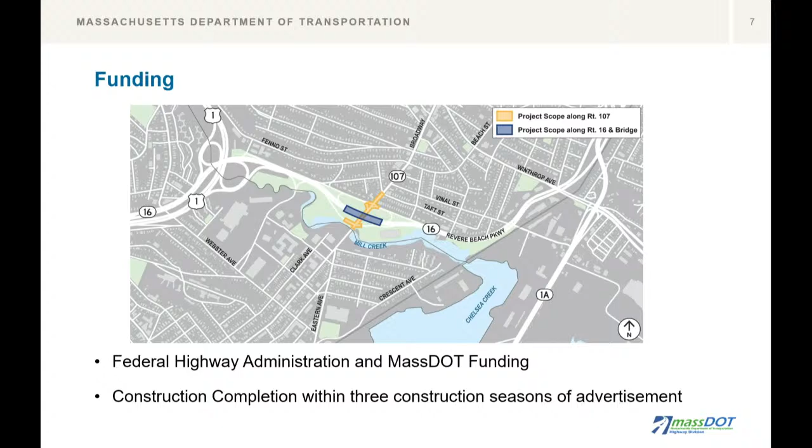So funding for this project, we estimate that the total project cost will be about $14 million to replace this bridge and do some improvement to the ramp work. And that will be in terms of 80% from the Federal Highway Administration and 20% from Mass DOT. Our anticipated construction completion is within 3 construction seasons from advertisement.

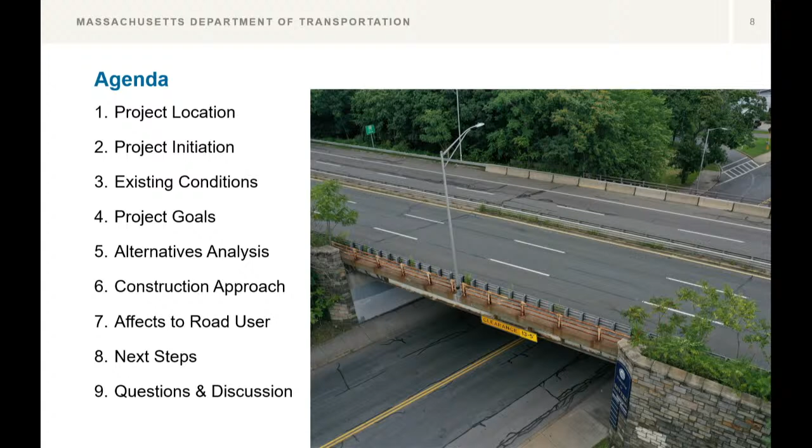So here's what we're going to be going over tonight: the project location, how was this project initiated, the existing conditions of the project, the goals of the project, the alternative analysis and proposed design, our anticipated construction approach, how this project will affect our roadway users, yourselves, the next steps for the projects, and then we'll do question and discussions. So where is the project located?

So maybe many of you drove under this bridge to get here tonight. I know that I did. And so it's located, you can see here, on Revere Beach Parkway is the bridge, or Route 16, over Broadway, Route 107. The project is north of Mill Creek and south of Taft Street.

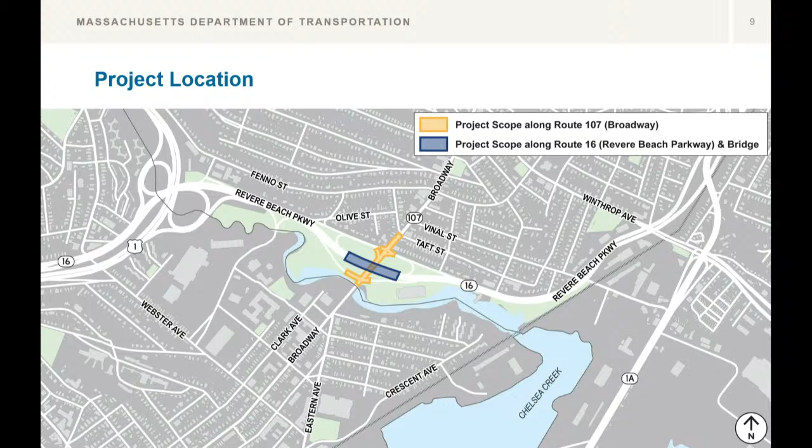So why was this a project initiated? How did this become a project with the Department of Transportation?

As you may be aware, the reason for the project is because the existing bridge is in poor condition. There are numerous noted deficiencies, which is why MassDOT has labeled this bridge as one that needs to be replaced.

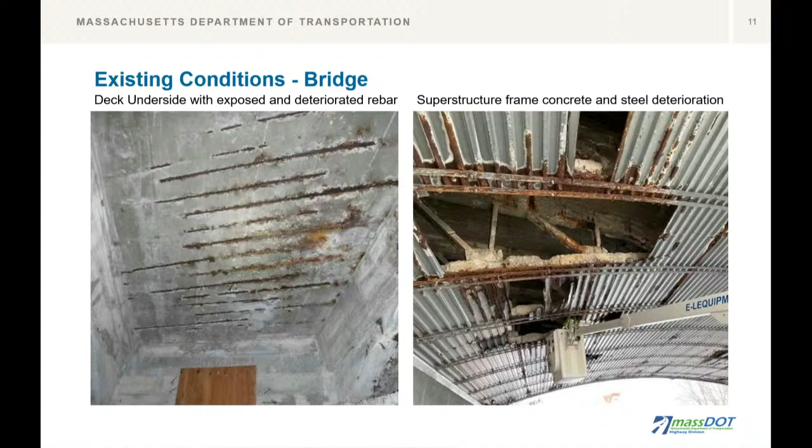The bridge was built in 1930 and was widened in 1958. It provides local connections between Medford, Everett, Chelsea, and Revere, and many regional connections between Route 1, Route 1A, and Interstate 93.

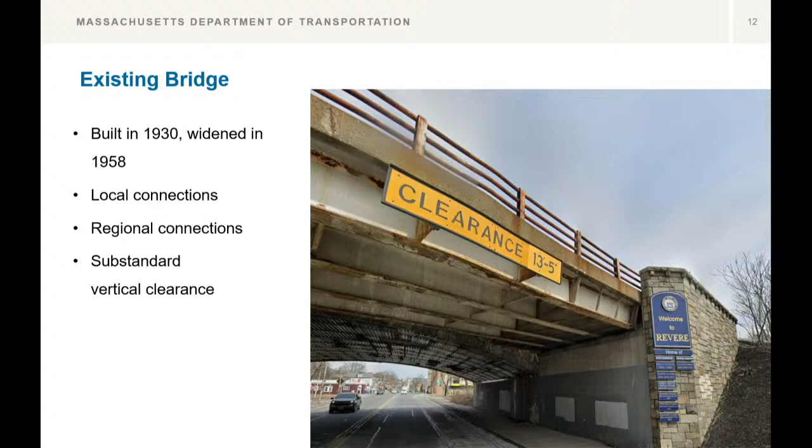Clearance is noted there because the existing clearance is currently substandard vertical clearance.

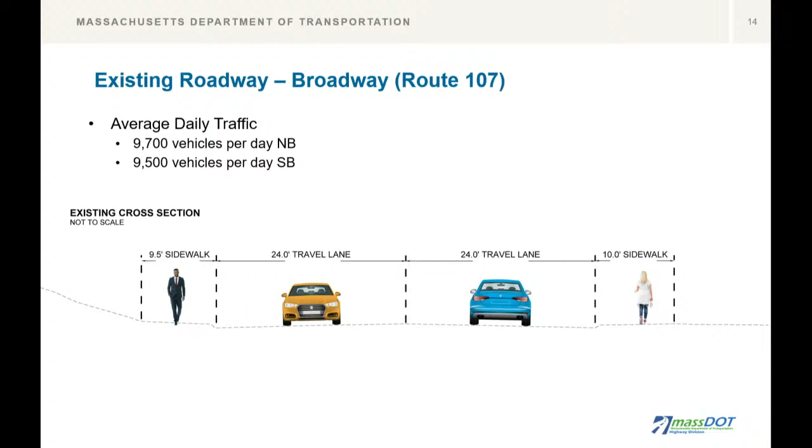The nearest bus stops to this project are at Taft Street to the north and Cabot Street to the south. The MBTA bus network redesign, as part of the Better Bus Project, identifies this route, T116, as an all-day high-frequency route.

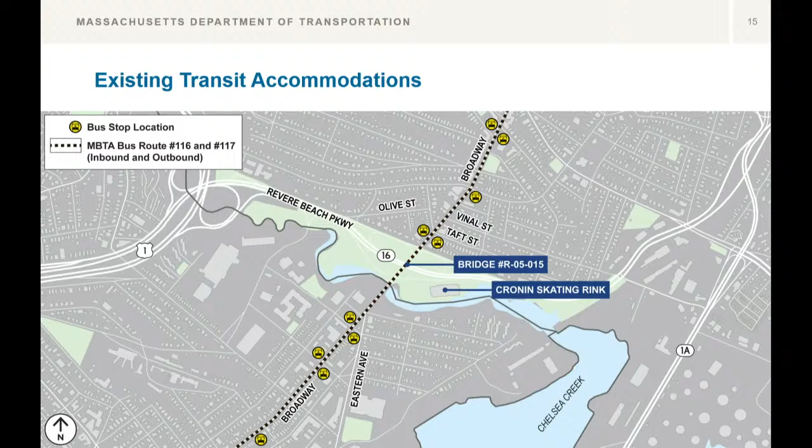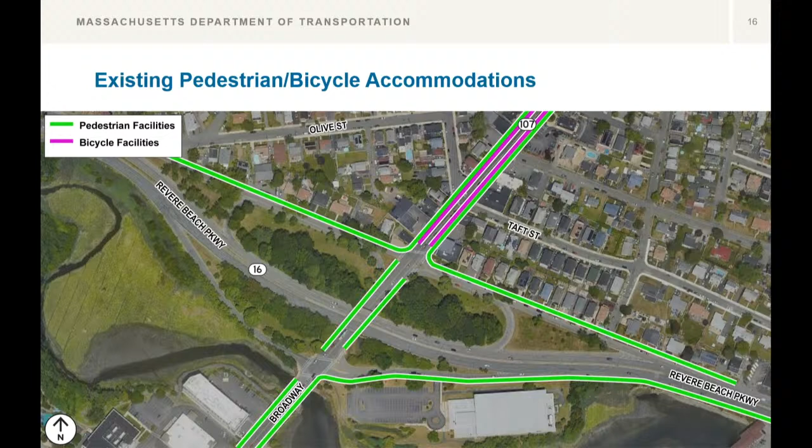Again, our project is the bridge replacement on Revere Beach Parkway over Route 107.

So how did we get here to this public informational meeting tonight? In December of 2021, we issued a notice to proceed to Howard Stein Hudson to do the design of this project. In August of 2022, MassDOT approved the preliminary structures report.

In the fall of 2023, we conducted our subsurface exploration program and got the bridge type selection worksheet approved. Then in January of 2024, the pre-25%, or conceptual design, which is the stage we're at now, was reviewed by the department. And now here we are at the public informational meeting.

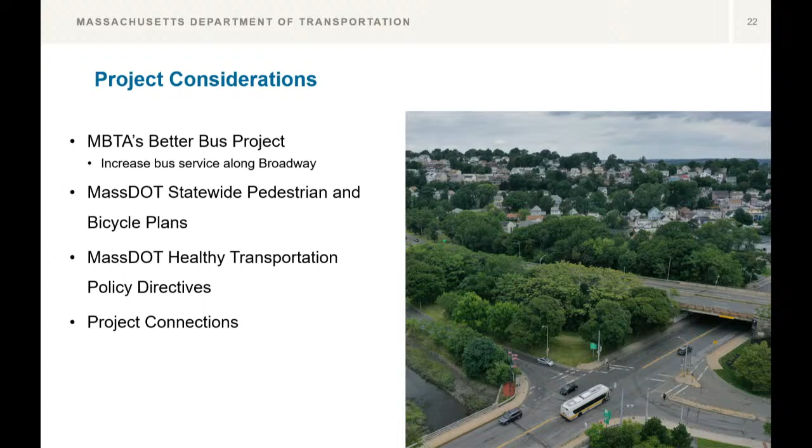Other project considerations are the MBTA's Better Bus Project to increase service within our project, MassDOT's statewide pedestrian and bicycle plans, MassDOT's healthy transportation policy, and making connections within our project to other projects being completed by others.

Project scope for Revere Beach Parkway and the bridge. As mentioned previously, the project includes complete removal and replacement of the existing bridge structure. We will need to rebuild Revere Beach Parkway to increase the profile over the bridge, required to improve the vertical clearance over Broadway. As the existing bridge is on the National Register of Historic Places, we also intend to maintain the historic character of the existing bridge.

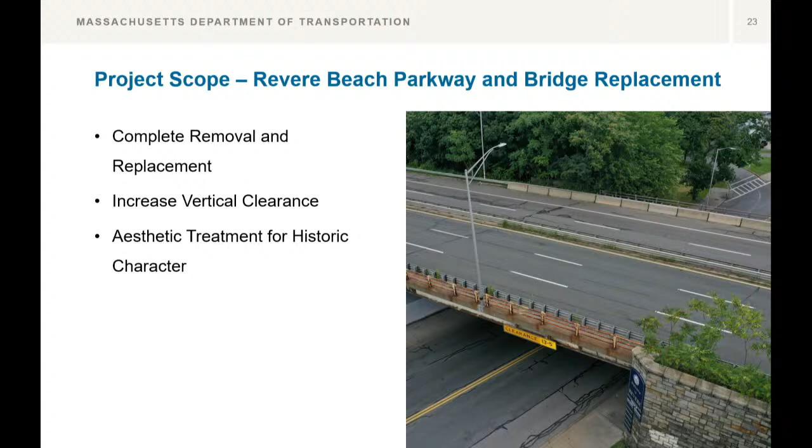We are proposing to make minor changes to Revere Beach Parkway in the final condition. However, we are proposing that the current westbound shoulder, shown on the left-hand side of the graphic, become an acceleration lane to assist traffic merging onto Revere Beach Parkway. The project is proposing to connect back into the existing Revere Beach Parkway configuration at the project limits. I will show a graphic later on to clarify that.

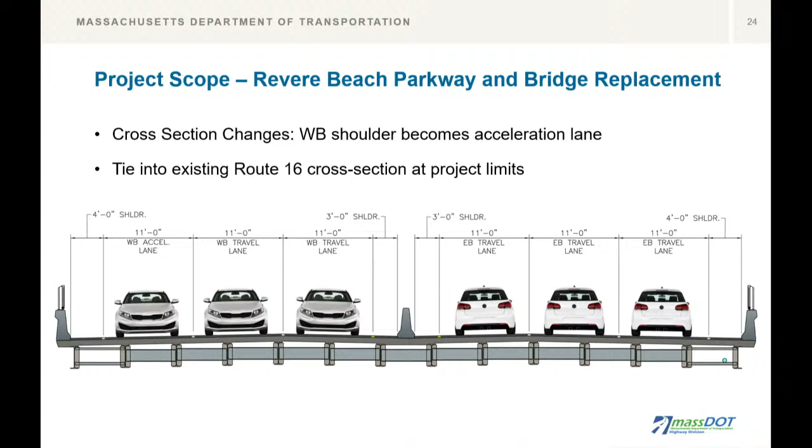Project scope for Broadway. The limits of our project begin at the Revere-Chelsea city line, shown at the bottom of your screen, and continue north underneath the bridge and up to the Taft Street intersection. We intend to reconstruct sidewalks on both sides of Broadway, add bicycle accommodations, and include bus priority measures where feasible.

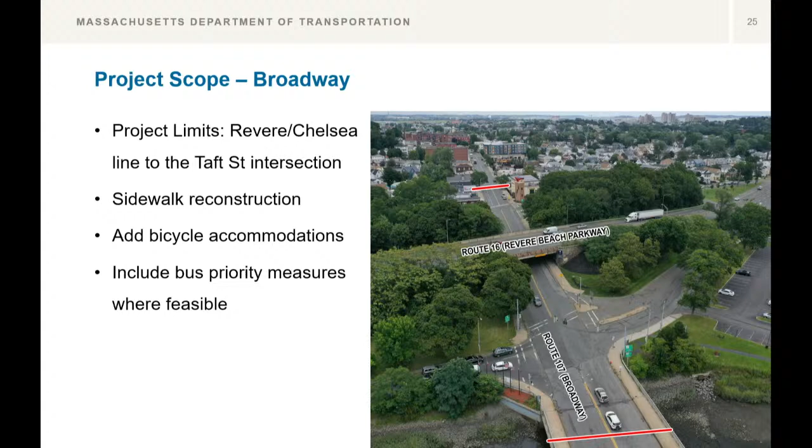What alternatives were considered? In the following slides, we will discuss some of the design alternatives we have considered for this project.

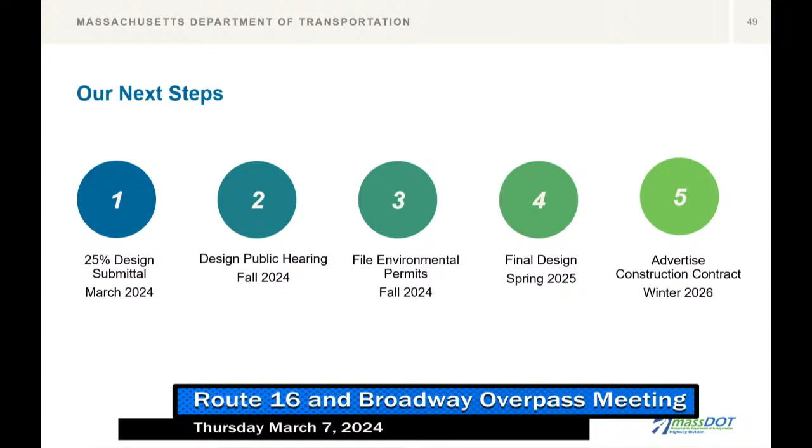Hi, second house on Revere Beach Parkway from Broadway. I didn't understand what you meant by road stop—stop control? Like on that crossing, on the Revere side. Right now that on-ramp is a curve, and cars are whipping around real fast because it's curved, not square. So you're saying there's going to be a stop sign at that intersection?

Come on up. We're going to be sharpening the curves a little bit so people can't come around quite as fast as they're doing today, and we'll be improving the crosswalks, with better pedestrian ramps meeting full ADA. We'll be tightening up the curves and adding stop signs coming off the ramp. So on Broadway, you won't have a stop sign, but if you're coming from either of the ramps approaching it, you'll have a stop sign before you turn onto Broadway. Right now you still have to yield to Broadway traffic, but in the future you'll have to come to a full stop before turning. That provides a safer condition and reduces the potential for conflict at the intersection.

Okay. So you're saying this won't start until—I couldn't see, was it December, fall of '25 or '26? It won't be advertised until the winter of '26. Yeah, I know, it's a process. Okay, so I guess this question is way too soon to even ask—like I said, our house is across from the bridge.

Far-fetched question: what if there's damage to our house? This has happened before where I lived, half a mile away, where they were blasting and the sheetrock cracked. So what happens if something happens to a house? You let me know, and then our resident engineer who's at the site—I'll let them know, and that's what we'll do. We'll work with you all. Okay, and there's no taking of property, right?

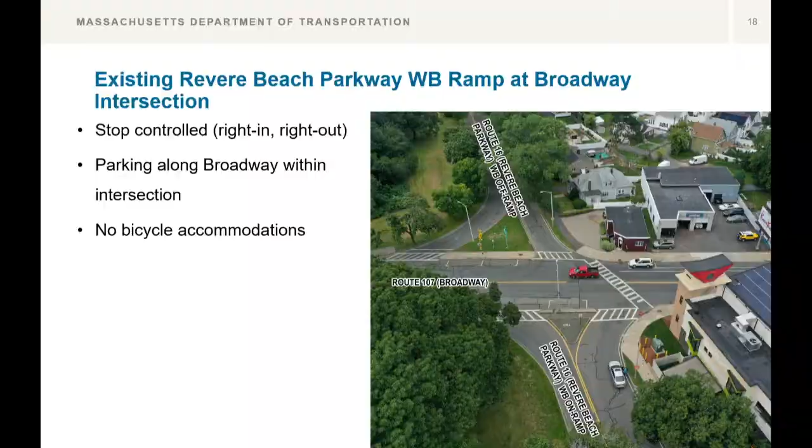Right now it's so early we don't have a lot of information, but right now we anticipate very few right-of-way impacts on residents—it's mostly on the parkland. The intent there is to be sensitive about trees and things like that; we don't want to take down any trees, so we're trying to replace the bridge in its existing footprint to avoid those types of impacts.

However, homeless people sleep in those bushes—we heard about that the other day. I'm sorry, but people at home can't hear you if you're not speaking into the microphone. When you answer someone's questions, please repeat the question, and if any experts are talking, please use the mic as well. All right, I'll grab you guys up here. Yeah, we did hear about that the other day at our legislative briefing.

So we'll be sensitive to that. You are? Okay. All right.

Hi, Paul Agenzio, I'm the councilor from Ward 4, and I represent the west side of Broadway. One of the questions pertains to what this woman just asked. You don't anticipate taking homes?

No, okay. So the question was, do we anticipate taking any homes for this project? And the answer is no, we do not anticipate that. And maybe I can show you.

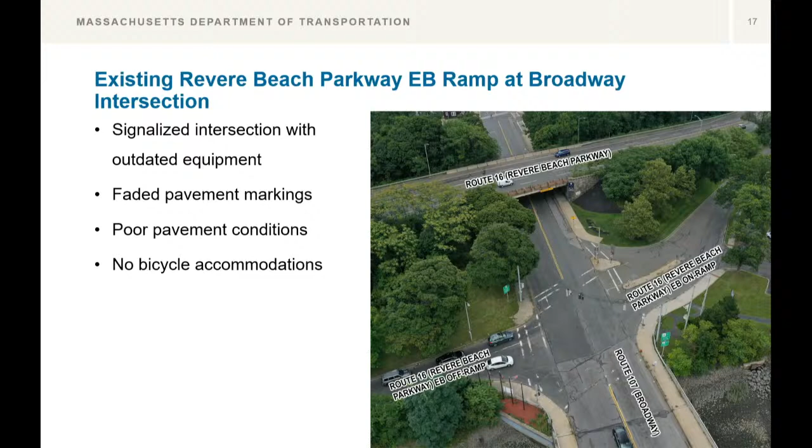I feel like this graphic, we had a nice graphic of the roadway improvements. Just give me one second. And when we did that nice thing to the alley, putting all those flowers and bushes there. Yeah, is it beautified, the area? Yeah, so we'll make sure that we replace that in kind.

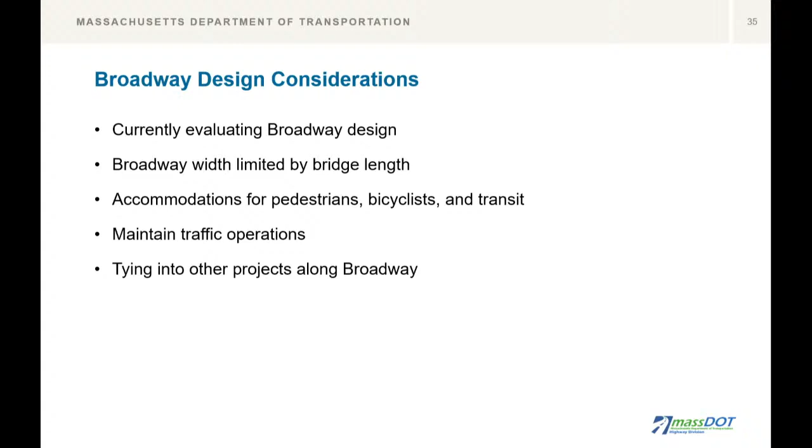One other question. When Broadway is closed, where would that traffic coming southbound be detoured through? Yeah, let me show you that too.

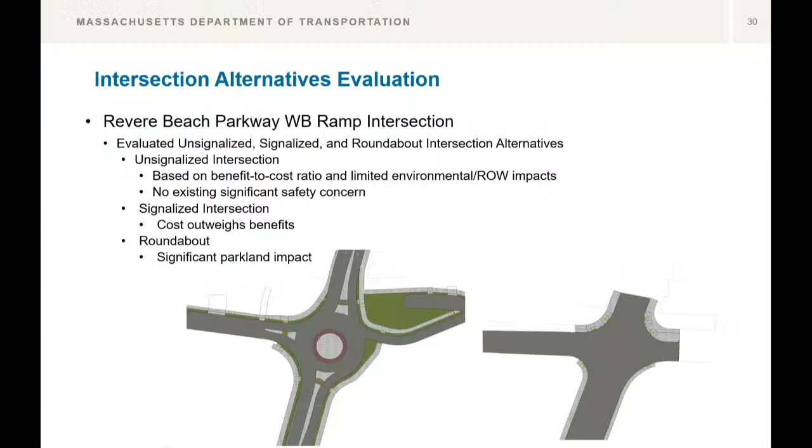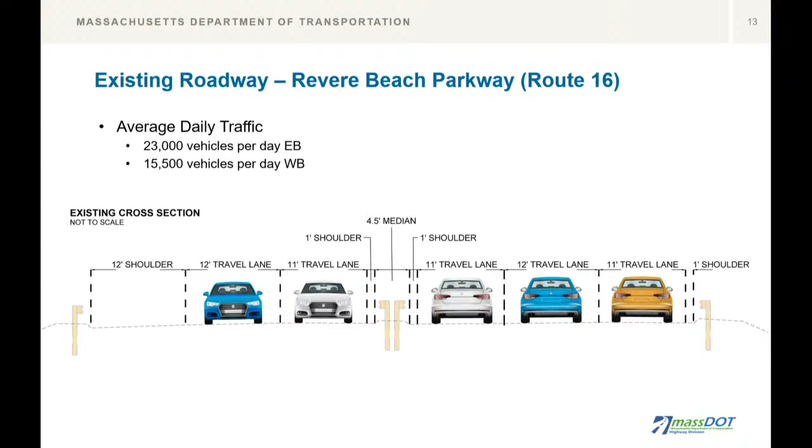Let me get to the right. I'm going the wrong way. Thanks.

So you'd actually go down the Revere Beach Surface Road. You would take a right there, and then head down to the nearest intersection, and then make a loop back. That's Webster Street? Okay, all the way down to Webster Street. So you're gonna go down, turn around, and come back eastbound on Revere Beach Parkway, and then you'll be able to get off at the signalized intersection and continue.

Same idea, if you're heading to Chelsea, you would take a right at the skating rink, head on Revere Beach Parkway eastbound to the nearest intersection, where you'd be rerouted back westbound, where you would then be able to access back to Broadway. That's only at night, and again, that's very few nights that we would anticipate that happening.

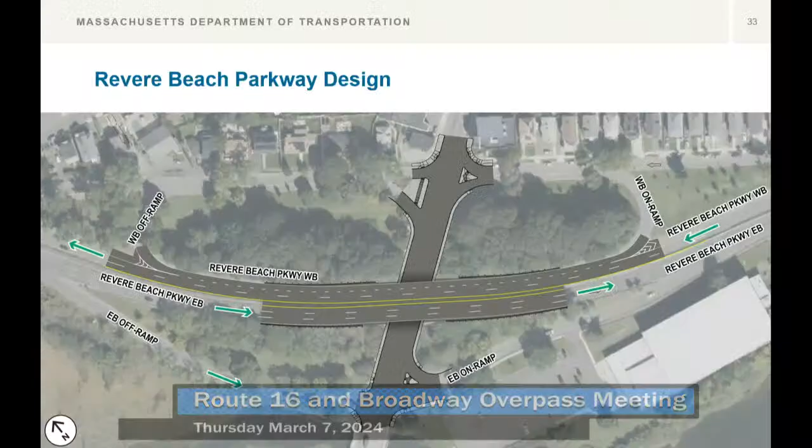Just want to make sure that's addressed. So the question was, which off-ramp was it? Coming off westbound at 107 - when you go over the bridge coming off in the westbound direction, are we going to be looking at drainage concerns in that area? And here comes Bridget Myers from HSH, she'll answer this question.

I just want to look for clarification on exactly where you're talking about - go back to that picture. Oh there it is, on the extreme left, on the exit ramp. So as you're getting off Revere Beach Parkway and getting onto the residential road - like at the bottom of the ramp there? Right at the bottom, there's a catch basin about 50 feet up the street. It goes down that way.

No, that's good to know - those are the type of things we look to get from you guys, because we're not always gonna see that. When we know information like that, we can certainly look into it and see if we can fix that problem. So we'll take that note. Good, thank you. The last thing is the deceleration lane coming at the same spot, coming over the bridge westbound.

That dotted line we see up there, is that considered a deceleration and acceleration lane? So cars coming westbound could use that as early as they can, as long as traffic's not coming upon it. Correct, it'll act... right now, the deceleration lane spot is very small and quick to come off. Right now there's just a wide shoulder, so you have to wait till you're pretty much over the bridge to get off. That whole shoulder is going to be converted into a lane, and yes, it'll be an acceleration and deceleration lane, so cars can go both ways, there'll be some weaving there, but that's correct.

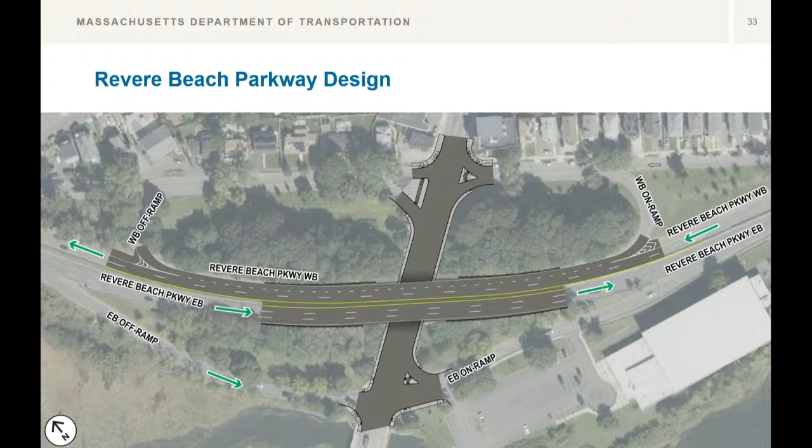My name's John, I've been with the business on Broadway. I'm confused about the time the construction starts, 9 p.m. to 5 a.m. So the question is, when will construction be happening? Hopefully this helps: construction will be happening during the day, but sometimes for things like bridge demolition and placing the beams for the new bridge, that will be happening at night, so that we don't have to close Revere Beach Parkway too often.

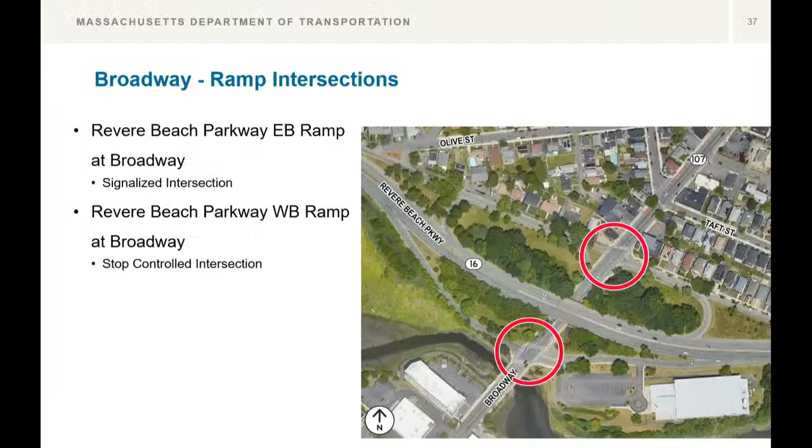Is that correct, that we don't anticipate any closures? Great, so the question was, do we anticipate ever having to close Broadway during business hours? And the answer is no, that's good news. I can add that the section we're looking to close on Broadway is just going to be within the limits of the bridge. The contractor just needs enough space to close that section off, basically the parking area, that's the only thing people won't have access to, because the contractor will be there, but that's it.

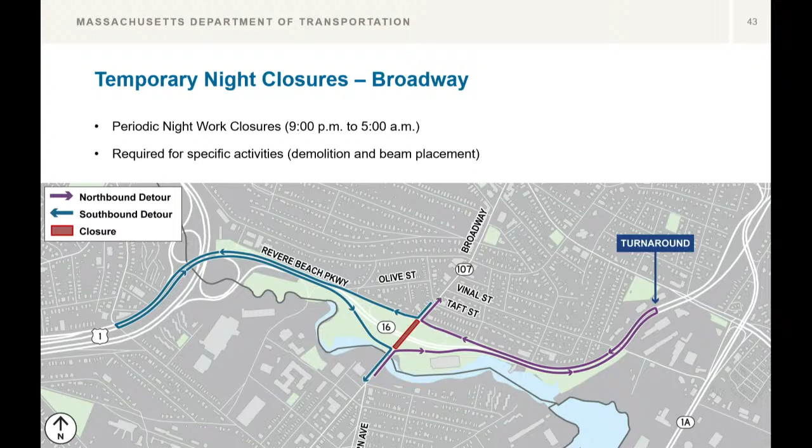Do you mean reducing the length, like the distance you have to cross? Yeah, that's what we'd always look to do. The width would still be the same, typically about 8 or 10 feet wide, but changing the angle—instead of doing the radius turn, making more of a close to 90 degree turn in that portion near their business.

Is there going to be a bump-out there where it kind of swings back in so people can still park on the parkway side of the homes? You know, drop the cars off.

So that's gonna be more of a 90 degree turn than a radius. Yeah, right, radial turn it is. Yes. And with the crosswalks, they're kind of coming in at the same spot, almost at the corner.